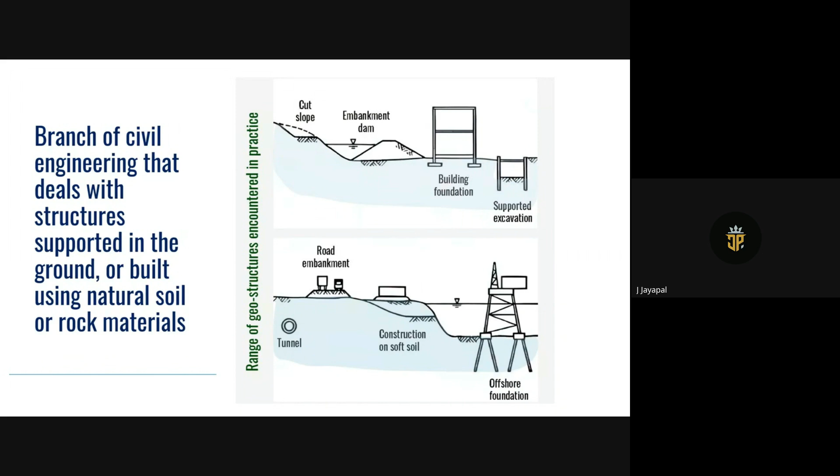Whatever applications you see on the screen are all geostructures, starting from cut slopes, embankment dams, building foundations, supported excavations, constructions on soft soils, areas closer to ports, marine soils, offshore foundations, road embankments, and almost all the areas you see here have the application of what we call geosynthetics.

This is a very fundamental thing that every civil engineer should understand. There are only three types of stresses in civil engineering: compression, tension, and shear. Apart from that we have other forces also, but let's keep that aside for this presentation. We'll focus on how soil responds to compression, tension, and shear. All these things you've been taught in strength of materials, engineering mechanics, fluid mechanics, and geotechnical engineering. Final year students would appreciate all this.

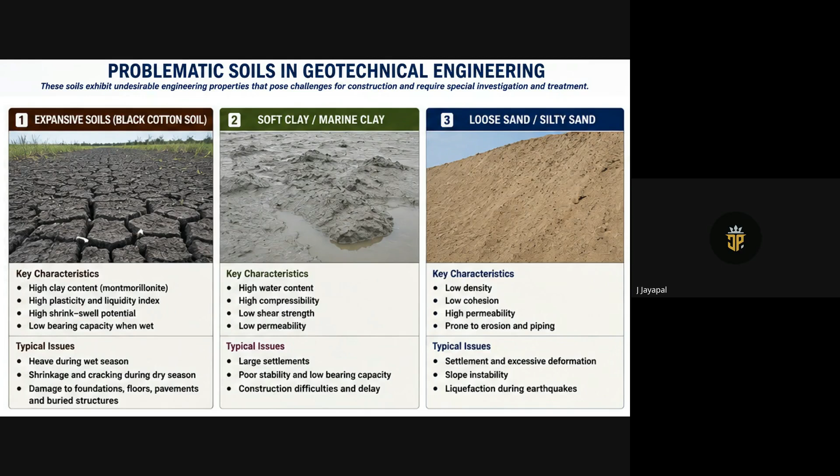Apart from that, we have collapsible soils, peats, and organic soils. I hope in this presentation to use both English and Tamil for easy understanding for students from Tamil medium background or people who don't understand English much. I'll use Tamil in between for better clarity. So we have collapsible soils, peats, and organic soils.

All these soils are usually discussed by civil engineers as ones to avoid. When you have peat deposits or organic soils, especially if you see in Tamil Nadu, in Kodaikanal, you have a lot of peat or organic soils. Usually these peat and organic soils are not suitable for construction, so civil engineers are suggested to avoid them.

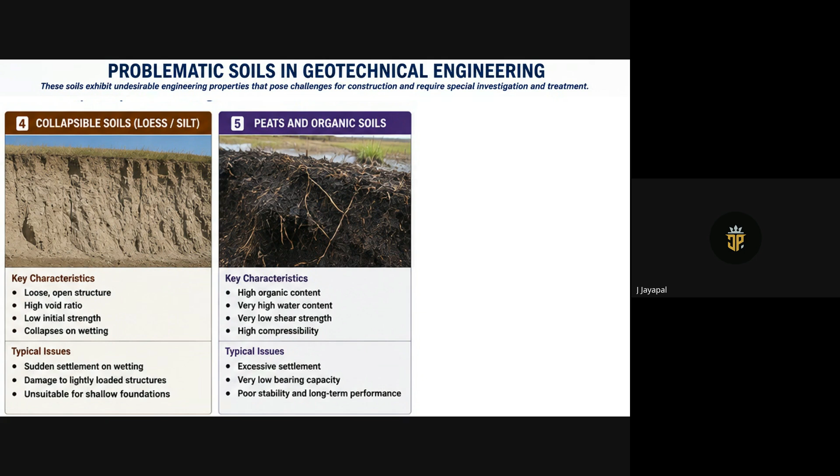Apart from that, you have dispersive soils, saline and sodic soils, and volcanic soils. They have their own unique characteristics like presence of dispersive clay minerals, high soluble salts, high fine content of ashes, sodic soils with very high pH, and low cation exchange capacity soils, similar to dispersive soils. So you have typical issues for every single kind of soil.

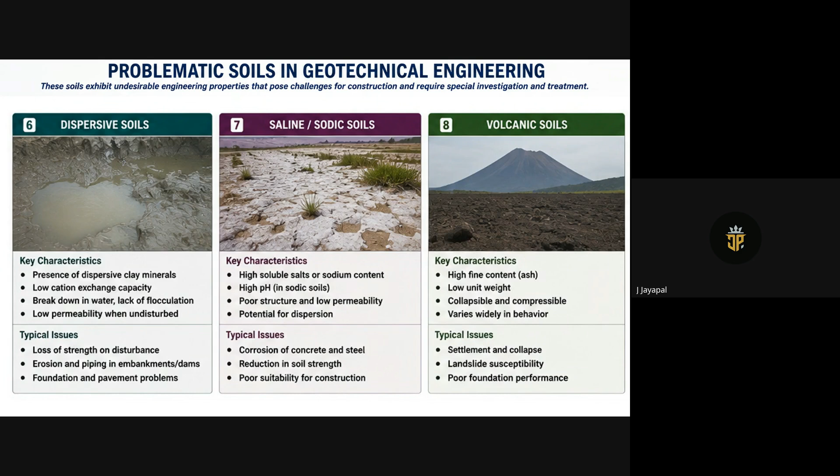The problem is, construction or planning for construction in all these soils is going to be very difficult, or challenging. When it is challenging, engineers are forced to think about alternative methods for solving problems arising due to these problematic soils. So all of these soils - let's say peat clays, liquefiable soils - come under this particular category.

You can go through all these key characteristics and the typical issues following with these kinds of problematic soils, once I share this presentation with Dr. Hari.

Jumping on to what is called a geosynthetic. A geosynthetic is fundamentally a natural or artificial product used along with soil in geotechnical constructions, geo-environmental constructions, or simply civil engineering constructions. You have both natural products as well as artificial products. Natural products include coir, jute, hemp, etc. Artificial products are polymeric products or metallic products.

When it comes to polymers, there are different types used in geosynthetics - probably in chemistry you might have studied different types of polymers. Polymers are fundamentally elements joined together with single units called monomers. All the geosynthetic products we'll discuss, aside from natural geosynthetics or geonaturals, are all made out of polymers. The word polymer is derived from Greek - poly means many, meros means parts. So it has many parts; you link all these parts in the form of monomers to get a polymer.

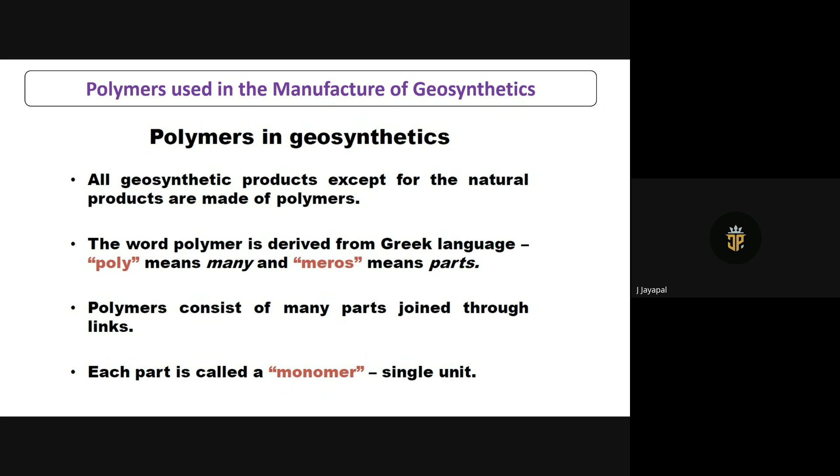So you have monomers. Polymerization is the process of agglomerating or combining all the products into a polymer. So finally, what you get is a product.

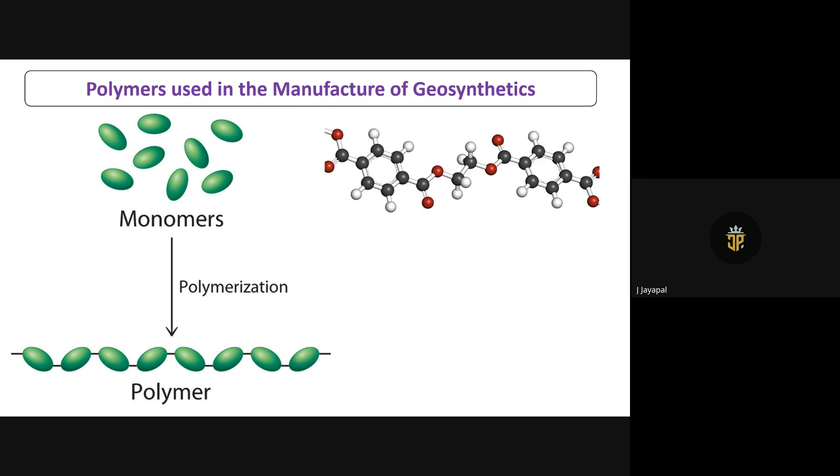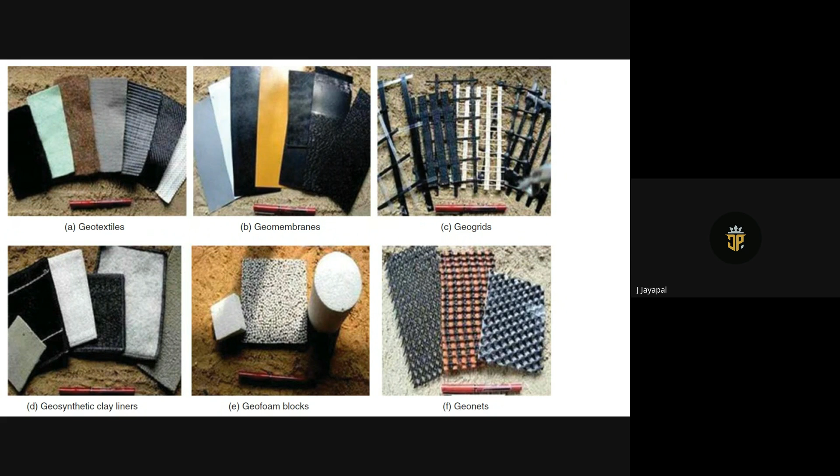Geosynthetic product. So there are different types of geosynthetics. I want you to pay attention here. You have geotextiles, you have geomembranes, you have geogrids, you have geosynthetic clay liners, you have geofoam blocks, you have geonets. There are n number of products. If you go to the market right now, there are plenty of products available. You have geocells, you have geobags, you have geocomposites.

So these are all some advanced additions to the geosynthetics family called as geocells.

So polymeric materials, which are fundamentally or specifically manufactured to be used in geotechnical and geoenvironmental applications, are made out of these polymeric materials, and then we use it accordingly in different sites.

The general definition we have said is different, but the fundamental actual definition provided by the American Society for Testing and Materials is that it's a planar product manufactured out of polymeric material, used in soils, rocks, earth, or any other geotechnical engineering related material, which forms an integral part of a human-made project, structure, or system. This is the actual definition provided by ASTM.

In India also, we have a code for geosynthetics, IRC codes, IRC specifications.

So you might have heard about reinforced concrete. The idea of reinforced concrete is like, concrete is good in compression, weak in tension. So you supply some material which is good in tension to compensate for the redundancy or the deficiency. It's the same with soils.

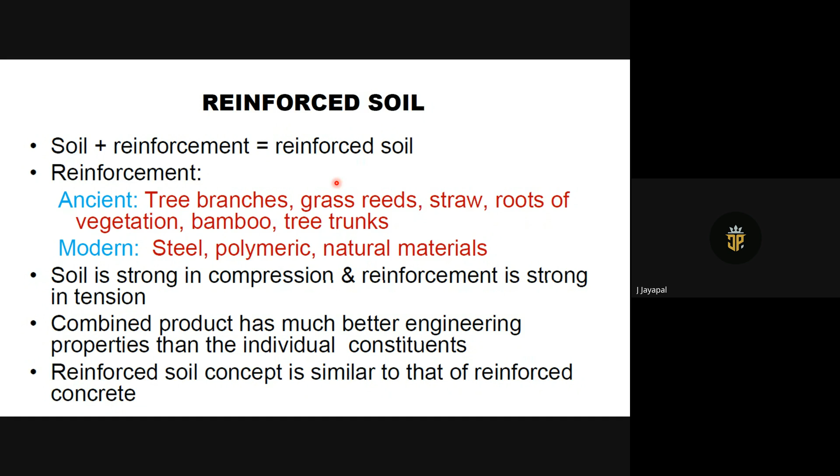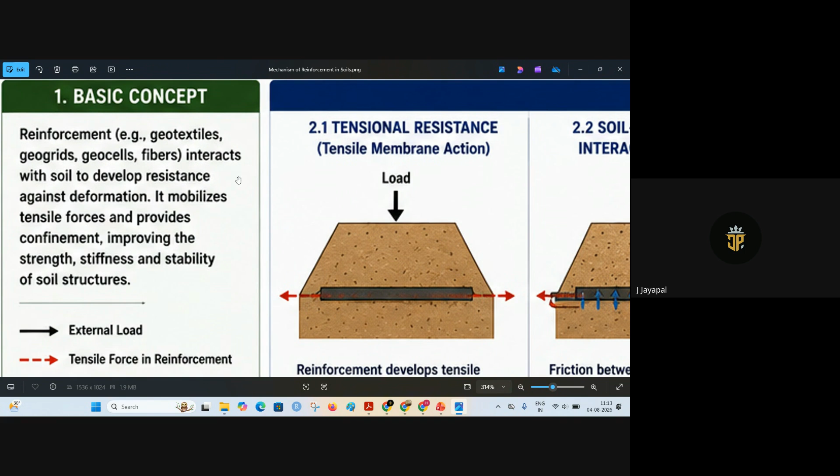So they interact with soil to develop resistance against deformation. It is going to mobilize tensile forces. It's going to provide confinement. It is providing the strength, stiffness, stability of soil structures.

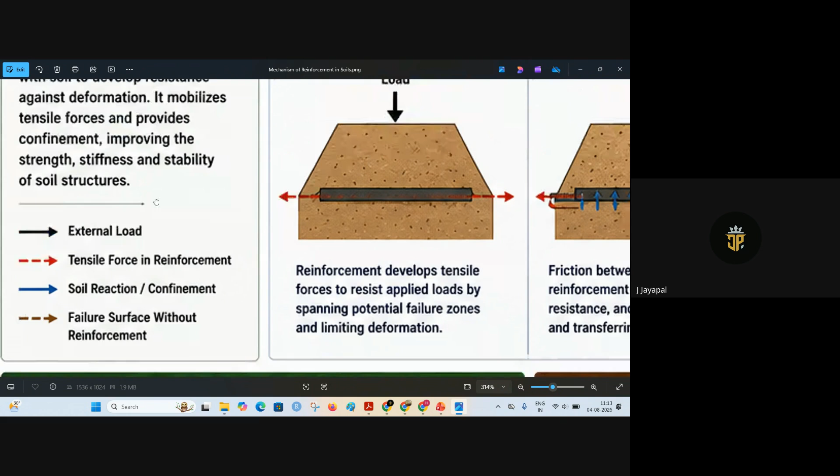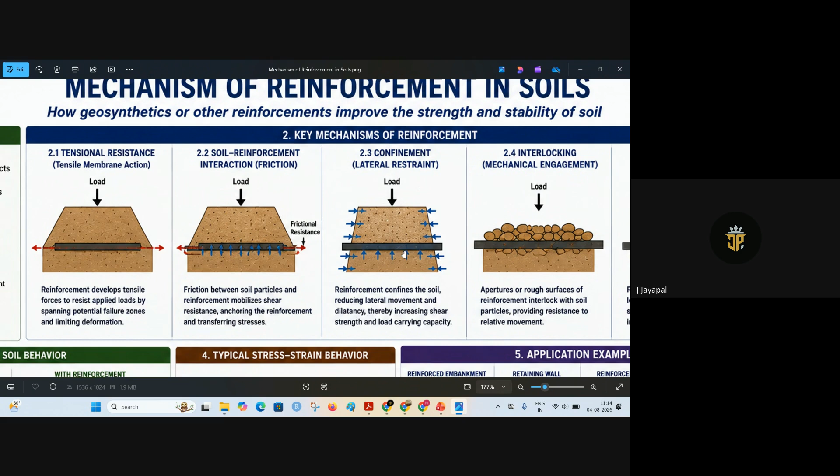You see here the tensile resistance is mobilized, or the tension mechanism in the reinforcement is mobilized with different types of key mechanisms. You can see that you have the tensile membrane effect when you place it inside the soil, or it can be experienced as interaction through friction, or you can say it provides a lateral restraint again if you place the reinforcements inside the soils.

And more importantly, when it comes to the case of geogrid, all of these particles get aggregated or get interlocked inside the spaces or apertures provided inside this geogrid. It's an interlocking mechanism.

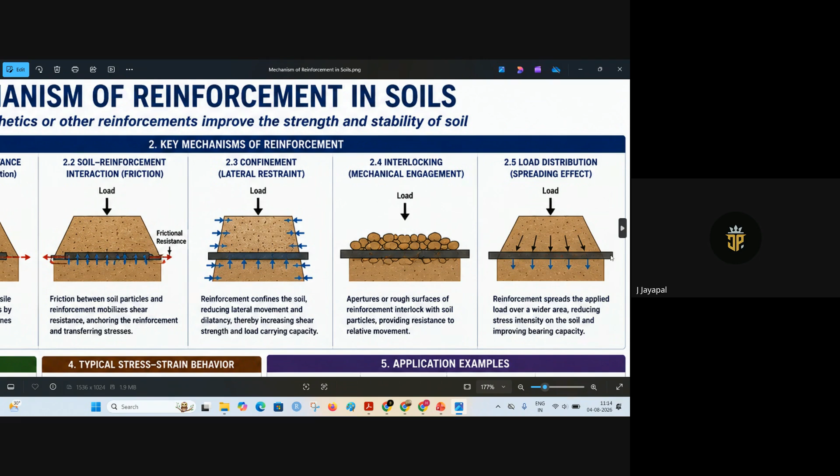And apart from that, you get the effect of spreading all these loads or spreading the tensile forces all along this membrane such that load is effectively transferred. So the key mechanism of reinforcement is through tension membrane effect, friction effect, lateral restraint effect, mechanical engagement effect, interlocking effect, and then the spreading effect.

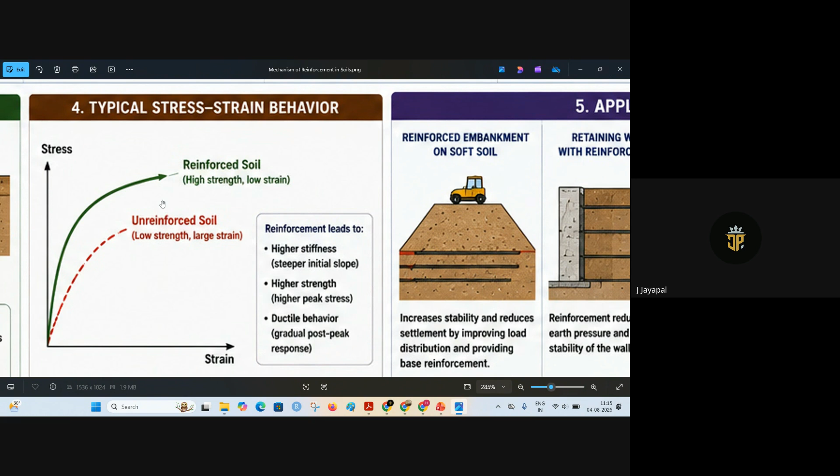Okay, so if you look at this particular stress strain curve of your reinforced soil and your unreinforced soil, you can see that unreinforced soils suffer large strains and low stresses. And if you plot again for the reinforced soil, you can see that the stresses experienced by this reinforced soil are pretty much higher, and for longer and larger strains. Okay, so this is very, very important for you to notice.

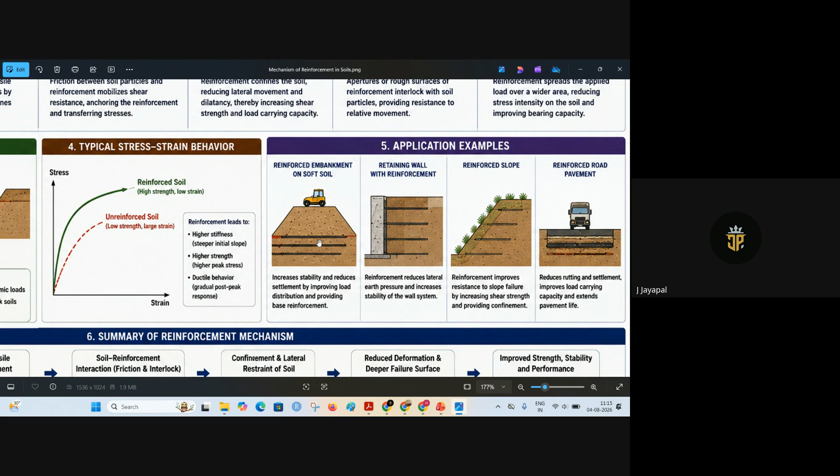And you see here, you have plenty of applications I'm going to make you comfortable with in due course. You can see that the reinforced embankment on soft soil can be constructed using these reinforcements, wherein the stability is increased and it reduces the settlement by improving the load distribution. You can take a typical example of a retaining wall. Possibly retaining walls you might have studied during your earth pressures related to K0, Ka, Kp. Okay, whatever type of retaining wall, with reinforcement you can just construct and increase the height of the wall.

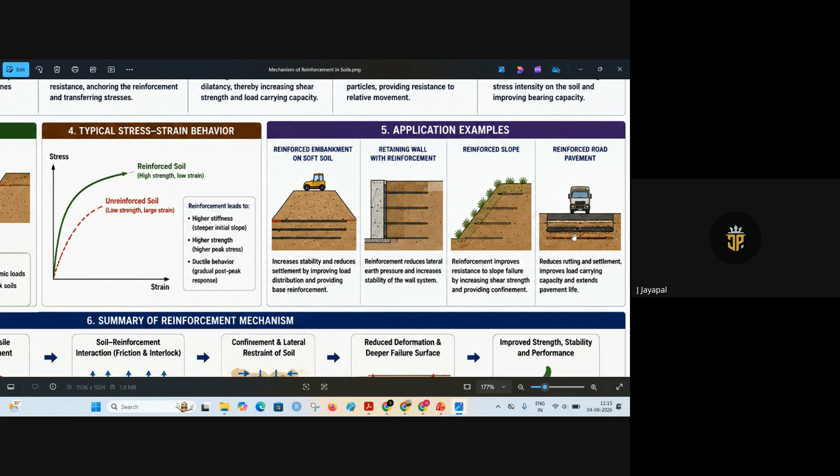And you can see that reinforced slopes can also be constructed with appropriate reinforcements such that you don't have a slope failure or slope instability. And apart from that, we have a wide variety of applications of reinforcements in pavements.

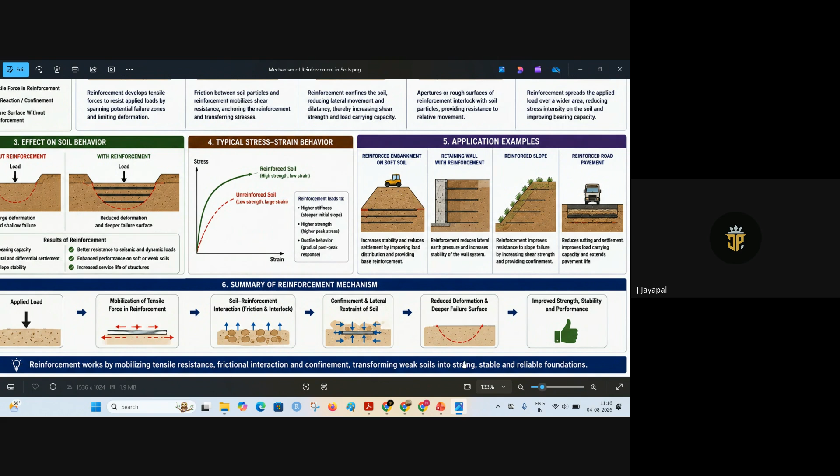Okay, so finally you see here the reinforcement works by mobilizing the tensile resistance, frictional interaction, confinement, transforming weak soils into strong soils, stabilizing, and finally giving us a reliable foundation. Okay, so this is the overall idea of the reinforcement mechanism or the way in which this geosynthetics work. Let's get back to the presentation here.

As I said, you have geotextiles, geogrids, geonet, geomembranes, and geosynthetic clay liners. This geosynthetic clay liner is a special product, a combination of clay powder and a synthetic material. Then you have geopipes, geofoam called expanded polystyrene (EPS), and geocomposite. If I combine a textile and a grid, it becomes a composite. If I combine a grid and a net, it also becomes a composite.

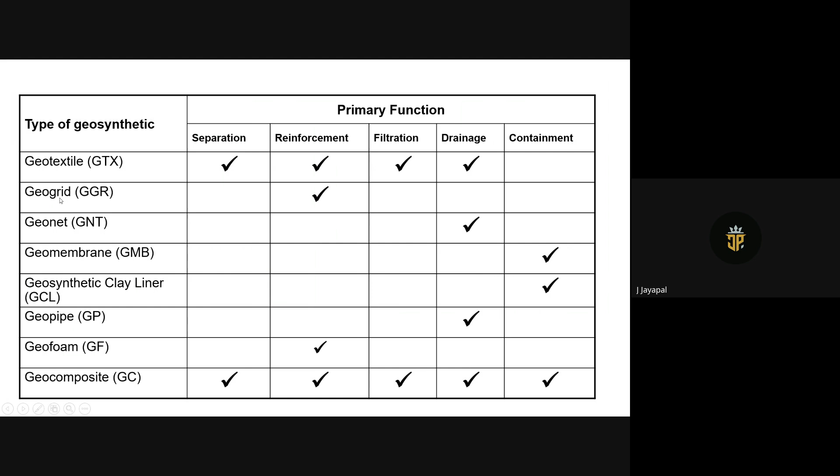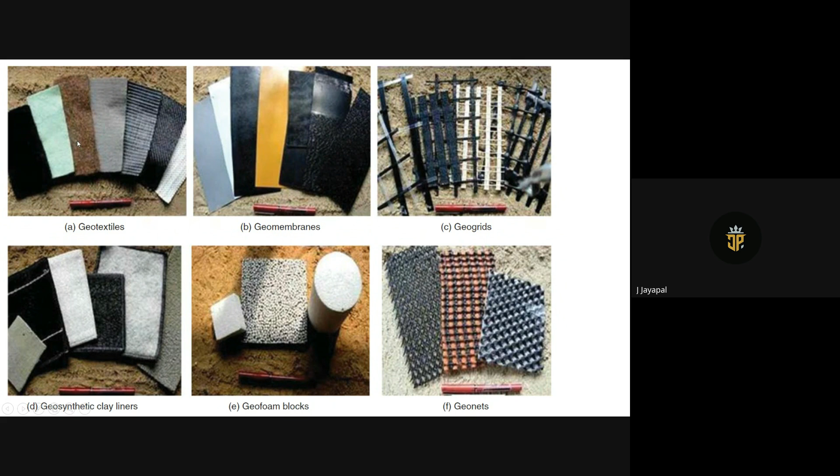Before I step into the roadway applications, let me show you the types of geosynthetics once more. This is basically a textile, this is a membrane, this is a grid. You have geosynthetic clay liners, which as I said is a sandwich of clay powder, possibly bentonite powder, stitched with top and bottom carrier and cover geotextiles. And then you have geofoams, expanded polystyrene, and geonets. These are all the major members in the geosynthetics family.

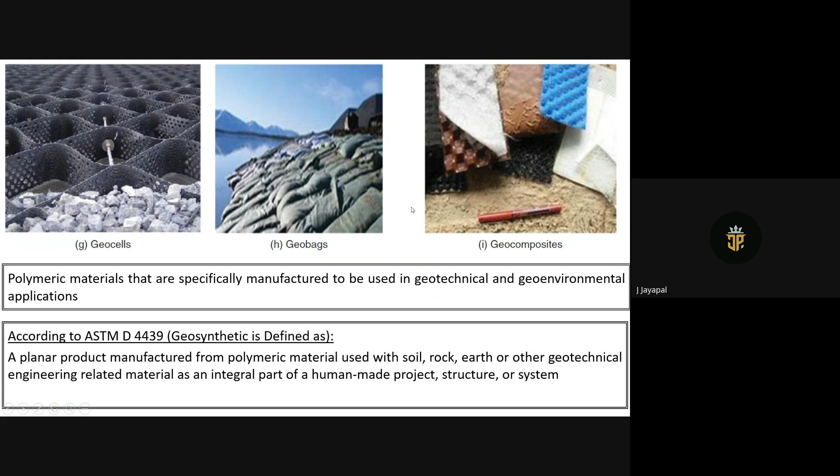Apart from that, there are other special products. Maybe if time permits, I'll touch on them. All these things are planar products, but this particular product is a 3D, three-dimensional product. You have geobags and then you have geocomposites.

Let's dive into the applications very quickly for the want of time.

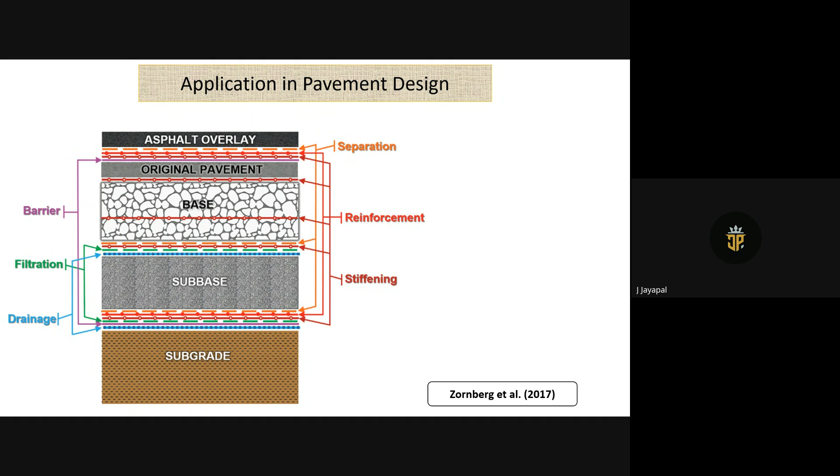Why? Because the majority of failures in highways or pavements happen because of tension and shear.

Let's take a typical example. You have two different soils, and let's say a truck is running on the surface over here. If this particular soil is a soft soil and you don't provide any reinforcement or separation member, all these aggregates get punched into the soil. Because of that, the traveling comfort is lost, the surface gets damaged over time, and the rider becomes uncomfortable.

Rather, what you can do is place a geosynthetic as a separator so that both soils are separated or contained, and you can see that the deformations are also less in both cases.

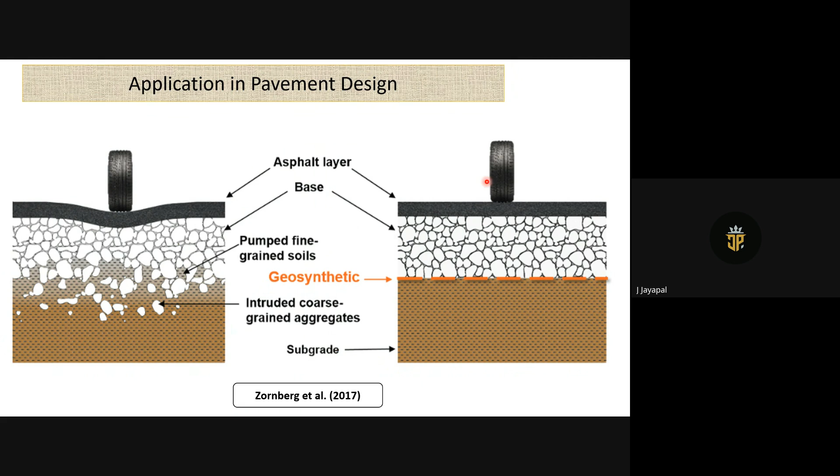If you compare, the amount of deformation happening here versus here is very clearly shown, just by providing one member called a geosynthetic, used as a reinforcement or separator.

The second thing you can see here is the additional pumping in of water during the rainy season or during increasing water table, sometimes during the monsoons.

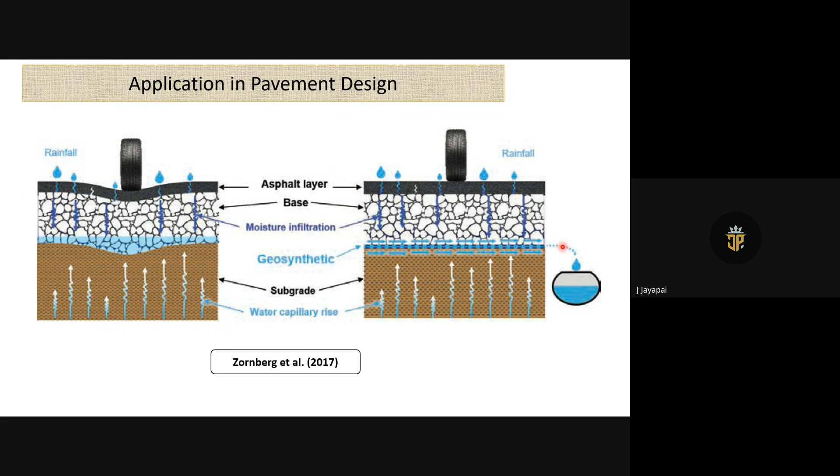There are plenty of other products available. In fact, there should be a separate seminar just for the products. Plenty of products are available, but we'll see only the engineering applications.

So this is a very beautiful slide that shows you what happens when you place a geosynthetic and what happens when you don't place a geosynthetic.

So again, the same typical example - you have a tire here and here, where the vehicle is passing. All the loads are concentrated in a specific place when these two soils are not separated, or when they are not sufficient enough to take care of the loads transferred from the wheels.

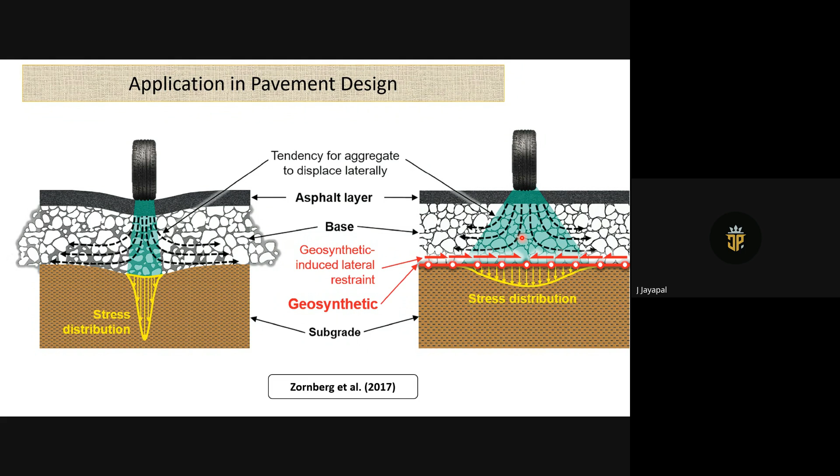This is one more effect - because of stress concentration you get to see a punching failure over here, and in this case you generally get a general shear type of failure. In geotechnical engineering you might have studied general shear failure and punching shear failure, so you can differentiate between the two.

So this is a very, very important application in flexible pavements.

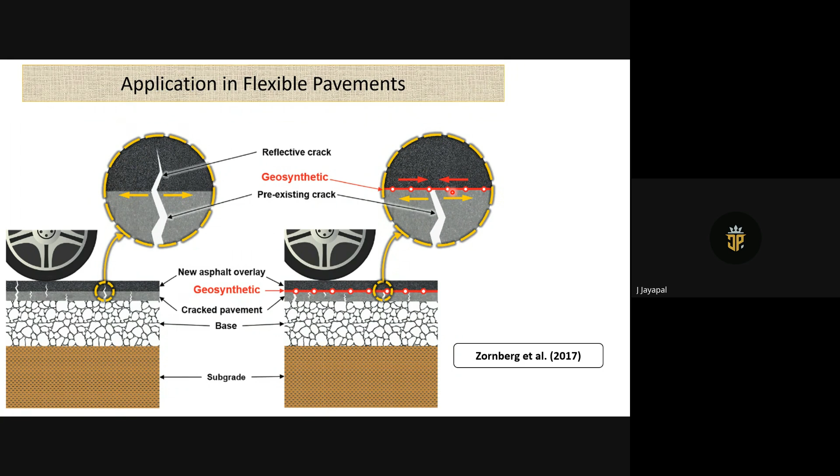Through this member you can transfer it - you can mobilize the tension stresses and tensile strains. So this is one important application of arresting reflective cracks in pavements, especially flexible pavements.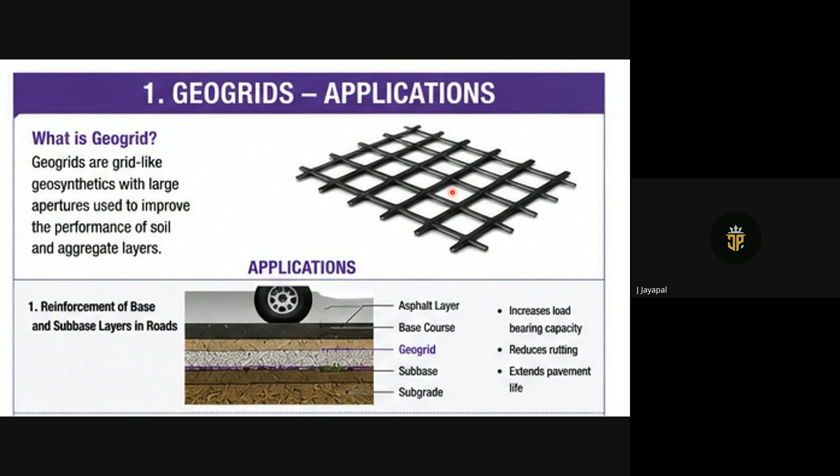So again, it's the same application here - these are all geogrids, just a simple repetition. You can use it in multiple places for easy understanding.

Again, retaining walls - you've directly seen many places, on highways you would have seen this type of retaining walls wherein the soil is getting reinforced. This is called your reinforced fill, and this is called your retained fill.

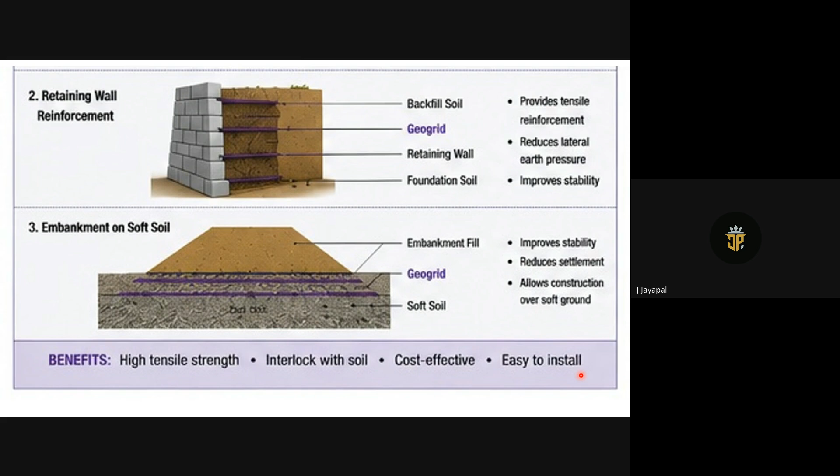Apart from that, they have applications in the railways. India is right now planning for high-speed rail corridors, and of course the first high-speed rail corridor is going to come from Ahmedabad to Mumbai. Now since trains will run at much higher speeds, the track needs to be stable. To enhance that track stability, you have to place appropriate reinforcements for railway track reinforcements.

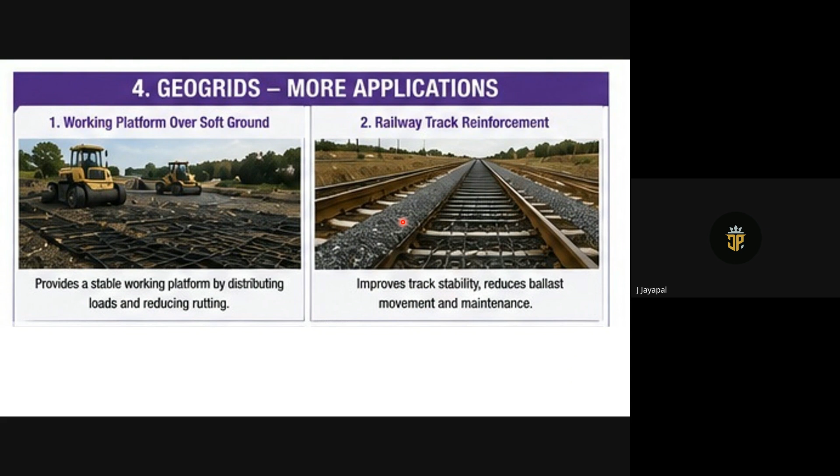You can use geosynthetics for improving the track stability, for reducing ballast movement and maintenance. Ballast is nothing but the aggregates. So you have ballast and subgrade. For railway track reinforcement, if you bifurcate it, you can see that you have different levels: ballast, subballast, then the actual rails, and then the subgrade.

This particular application, you all may have seen it, is called mechanically stabilized earth walls, MSE walls. What you do is reinforce the soils and you have these facing panels to hold all these reinforcements that are connected, with pavements running on top. In India you have this type of wall, whereas in foreign countries you have back-to-back walls, where there is a wall on this side and also a wall on that side - called back-to-back walls, B2B.

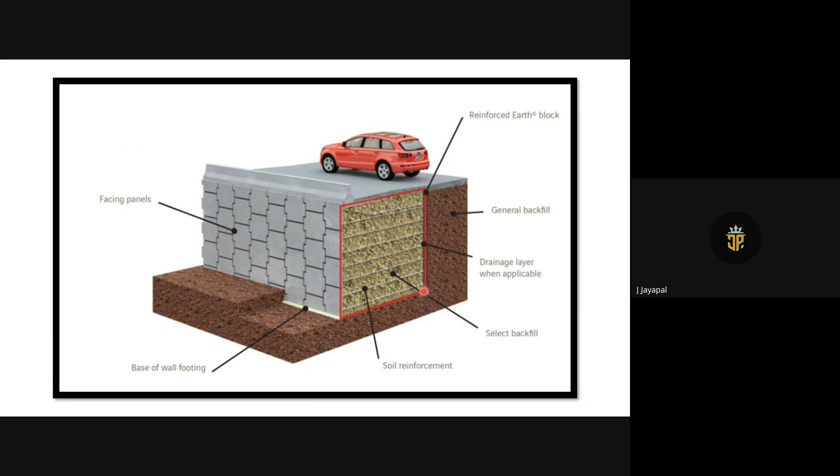You can see the base of the wall footing, the facing panels, and the soil reinforcement. This is the selected backfill or reinforced fill, and this is your retained fill. So you have separate drainage provided where and when applicable. You can see vehicles traveling on top. This is a very, very important application.

Let's say, for example, there is a slope over here - forget about this car and this space, let us initially assume this is the slope with only one lane. If you want to suddenly increase the height of the slope, you have to additionally add soil here, but just after adding soil, your slope cannot be retained because it will start to fail due to instability. This is because the angle cannot be increased beyond this particular slope. So in that case, what you do is reinforce it, and you can increase the steepness of the slope.

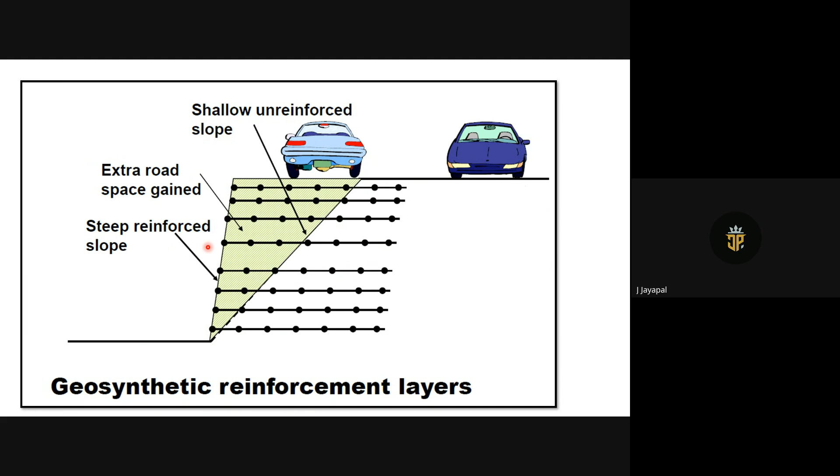The exact same application was brought out in this real-time scenario at Vijayawada. There is a temple called Kanaka Durga temple, and this is the pathway to that temple. They were facing a unique type of problem - this is a narrow stretch of a single lane road. When people go to the temple festival there to worship, there is heavy crowd congestion and traffic cannot mobilize. People coming from the opposite direction also cannot travel that distance.

So the proposal made was to effectively address this issue by building a wall. You can see the wall over here - it was the largest wall built at that particular time, around 22 meters high, a geosynthetic soil retaining wall to widen the road at Vijayawada. By building this wall, they mobilized extra traffic and gained road space. IIT Madras was the consultant for this particular project, and my guide Professor Rajagopal was the consultant, so these slides are borrowed from him.

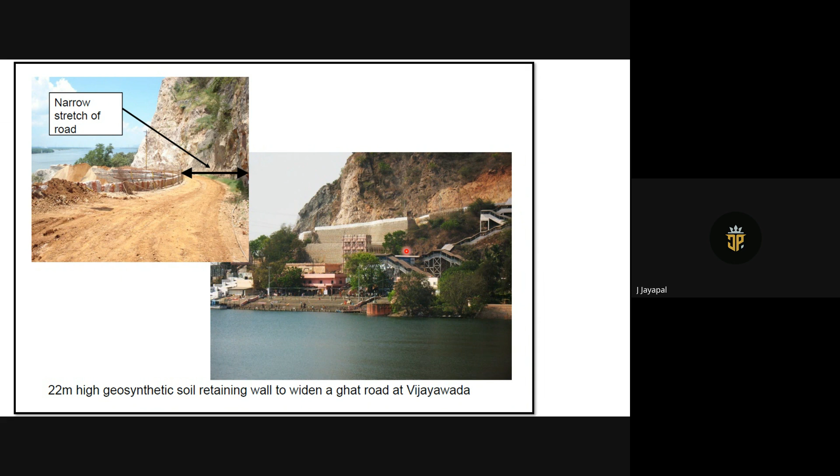It's a very effective application of geosynthetics, a real-time example that even now, if you go by train, you can see this particular wall.

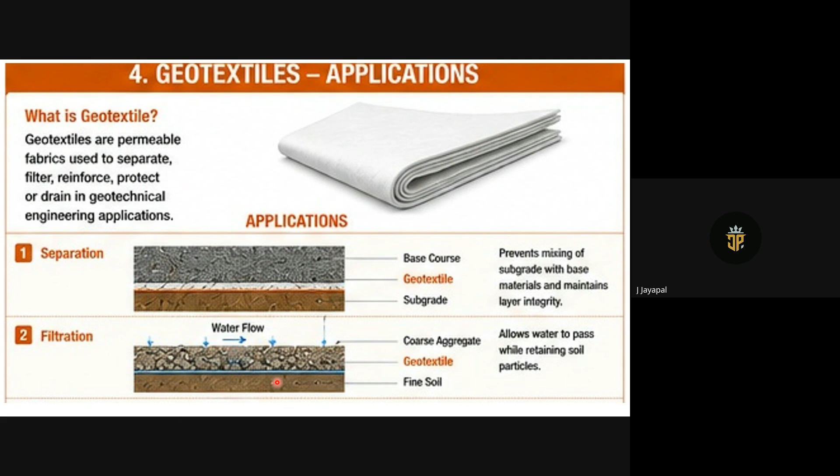Regarding filtration, I want you to notice carefully - filtration happens in two directions. One is in-plane filtration, where water travels parallel to it, along the plane of permeability. The other is vertical permeability - one is horizontal, the other is vertical. You can also call these in-plane permeability and cross-plane or out-of-plane permeability. The arrows represent this correctly, showing water traveling along this path as well as vertically - both directions of permeability are effectively provided by these geotextiles.

Apart from that, you have geonets. There are many differences between grid and net - grid is primarily used as reinforcement, and they are very strong members, whereas geonets are usually useful for drainage applications and are a little weaker members.

You have subsurface drainage or vertical drainage, wherein you can use these geonets, which is useful fundamentally to collect and convey the water to the pipe and finally reduce the excess pore water pressure generated during the loading applications or process.

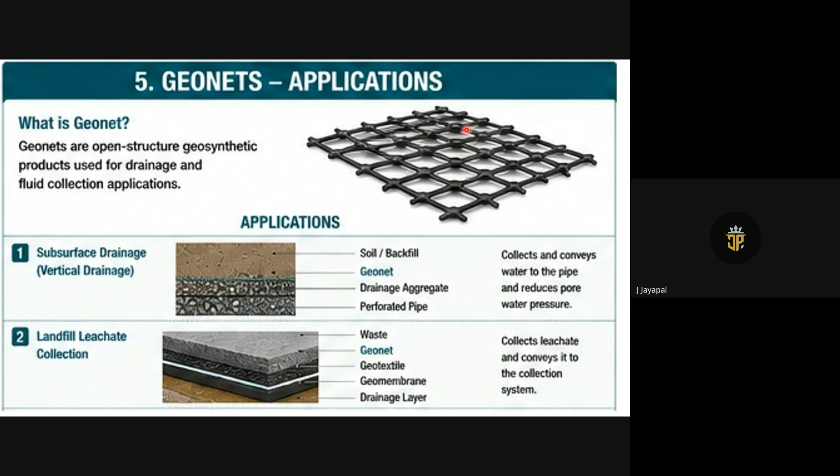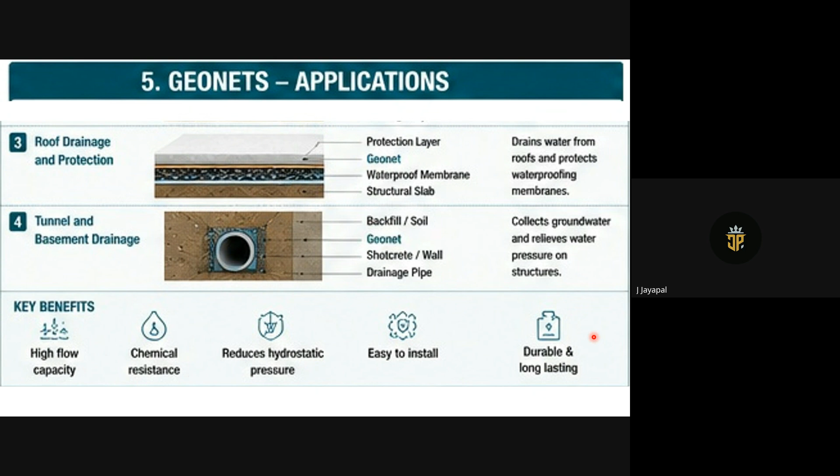These are all factory made products - manufactured in our factory, so we can control the properties ourselves. Whatever properties I want, the engineer will design for me in the industry or factory.

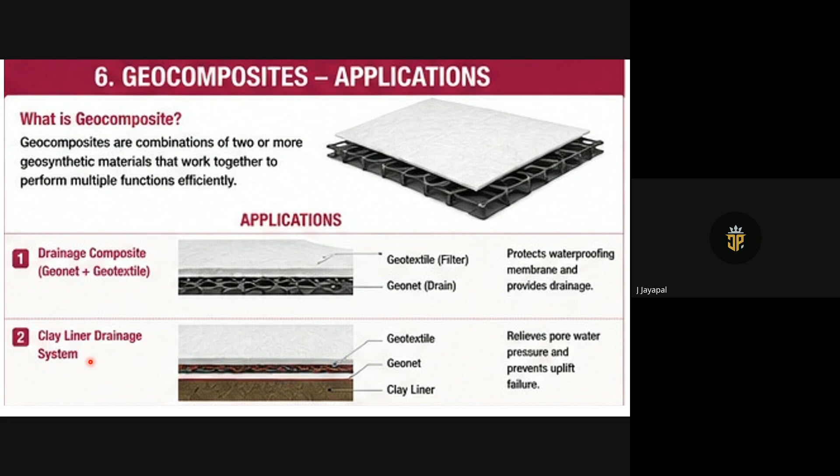As I said, when I combine two different materials, it becomes a composite. These geocomposites are a combination of two or more geosynthetic products or materials to perform multiple functions. One is called a drainage composite, when you have net and textile together. The other is a clay liner drainage system or geosynthetic clay liner, which we will see. Apart from that, you have different applications in landfill gas ventilation and pavement drainage layers - I'm not reading out the key benefits, you can go through them later.

The third important product is called geofoam. This is a very least explored geosynthetic product, I would say. It is a very lightweight material - rigid blocks used to fill material to reduce the weight of structures. When we have the mindset of reducing the structure's weight, we can use this lightweight material. These materials are not only light in weight, but also equally tough. A single person can easily carry a large block.

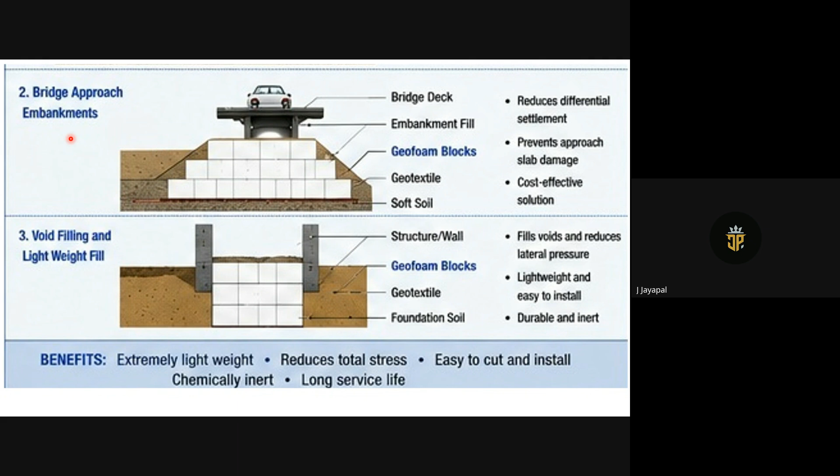So the applications are running between bridge approach embankments, void fillings as lightweight fill. Wherever you can use all of these lightweight materials to reduce the stresses and settlements.

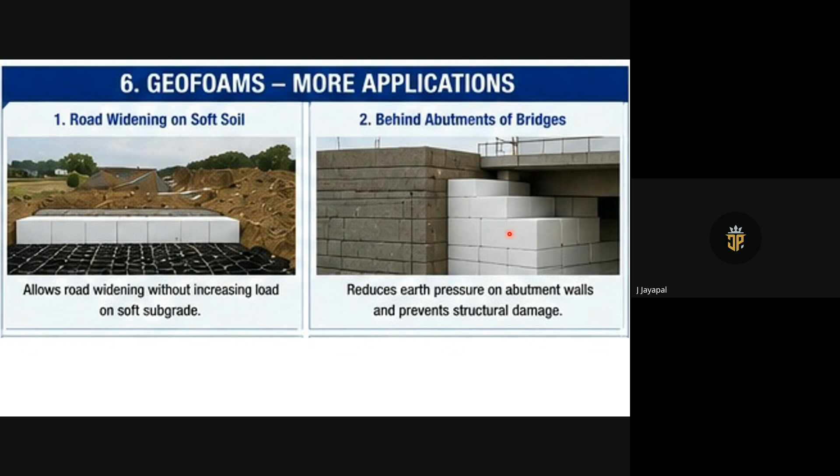They use it below that. But in India, the applications are very, very less. In fact, there are no such applications. But in foreign countries, you can have these kind of applications. There are separate codal provisions available in ASTM, especially for this geofoam or expanded polystyrene. In India, there are no such codes. In future, it will be developed.

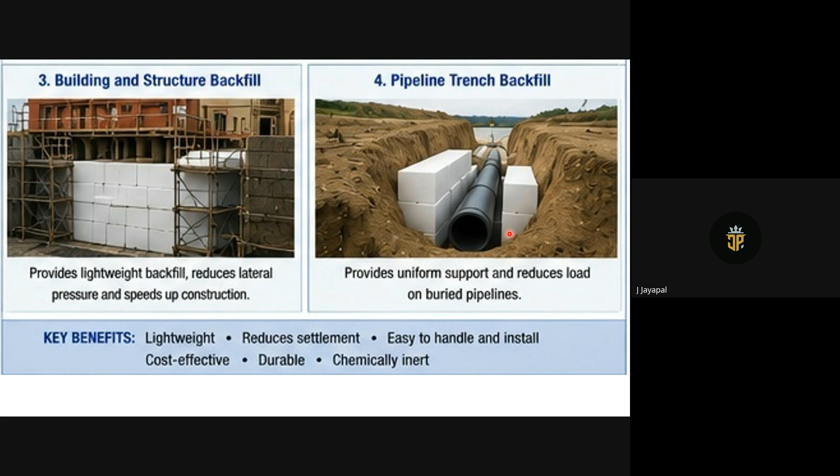Let's say, for example, if you look at pipelines, its alignment should not be disturbed, and the pipes should not be stressed because of the soils. So what they do is lightweight materials or cushioning materials will be provided. It can act like a cushion as well as a lightweight material for large diameter pipes and for long pipelines, carrying different types of liquids or whatever material inside.

So it is going to be light in weight, it's going to reduce settlement, it's easy to handle and install, it's cost effective, it is durable, it's chemically inert also. And if you look at its durability, it will be holistic and homogeneous, the same throughout. Why? Because it's again a factory made product. So you don't have variability of the material along this particular area when you have these blocks.

Different types - if you go online and search you will see that you have these blocks in different sizes. Accordingly, you can tailor make and you can create.

So let's see this problem very quickly, or let's try to quantify what we have said. Let's say that you have a 7-meter high embankment, which is 60-meter wide. It has to be constructed on a soft clay with water table on the ground surface.

The soft clay thickness is 5 meters. And the increase in stress in the clay layer can be taken as the pressure under the embankment, because the clay layer is thin when compared to the width of the embankment. So the clay layer has the following consolidation characteristics.

Your initial void ratio is 1.1, gamma is 19, your compression index is 0.5. There are two options considered. One is soil fill, the embankment of soil which you fill. The other one is you can use geofoam, lightweight material. So the soil fill has unit weight of 20 kN per meter cube, and the geofoam fill is 2 kN per meter cube.

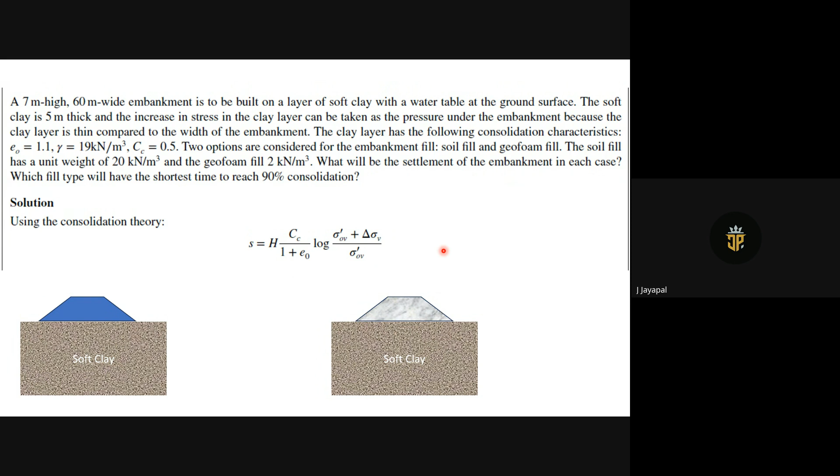So what will be the settlement of the embankment in each case? That's our primary target. You use your consolidation theory equation, H*Cc / (1+e0) * log[(P0 + delta P)/P0], or sigma naught, sigma dash V, delta sigma V by sigma V dash. What you do is try to calculate the stresses for both the cases.

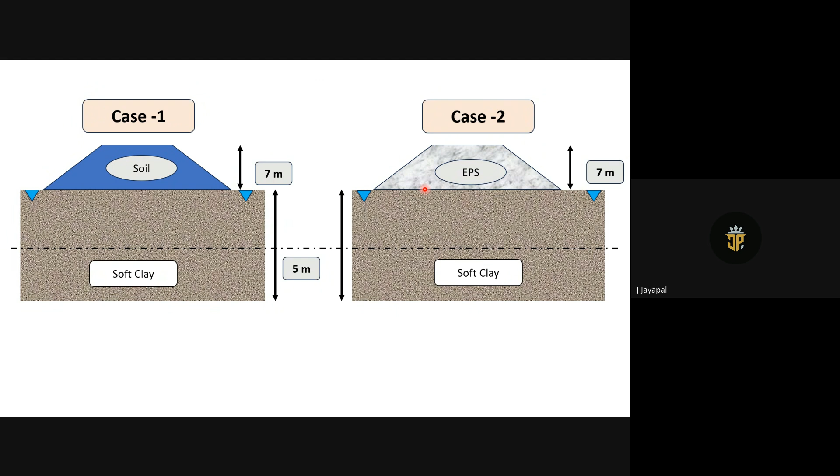So you see that both the embankments are of 7-meter height. The thickness of soil is 5 meters for both the cases. Both are soft soils. The only difference is the left-hand side case one has a soil embankment, and towards the right you have an embankment constructed using expanded polystyrene or geofoam, lightweight material.

So if you try to calculate the stresses, your delta sigma V, if you compute, becomes 20 times the height of the embankment, which is the unit weight. 7 is the height of the embankment. It becomes 140 kPa. And if you want to calculate the initial effective stresses, if you compute it by this equation, 2.5 into 19 minus again the excess pore water pressure that is generated, you get 23 kPa as your effective stress, the initial effective stress.

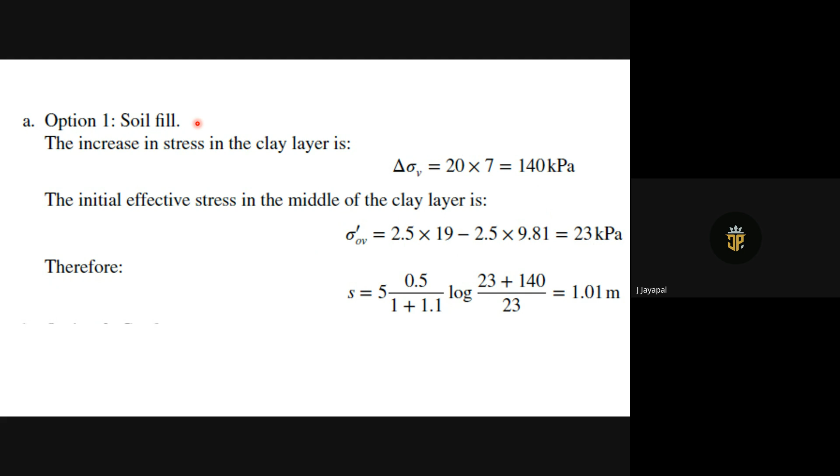Finally, if you plug all of these values into the settlement equation, which is HCC by 1 plus E naught, log of P naught plus delta P by P naught, the settlement you get is around 1 meter or 1000 millimeter for a soil embankment. When you build an embankment with soil, the settlement you get is around 1 meter. Second case, if you use a geofoam, a lightweight fill, you do the same calculation again, and finally what you get is 0.25 meters, which means 250 millimeters settlement when you have a lightweight embankment or lightweight material. So I can reduce the settlement by 1/4, and most importantly the time taken to construct is also less. This becomes an advantage for an engineer.

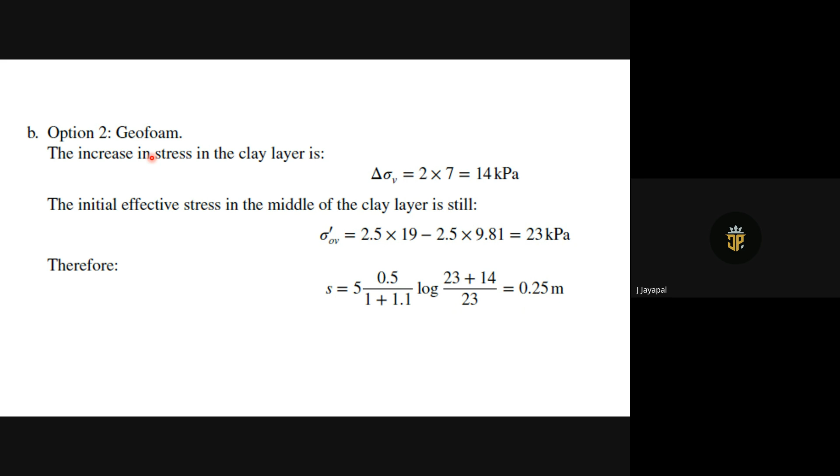Next product is your geocell. As I mentioned before, all the other products are 2D planar products, but this is not a planar product, this is a 3D product.

This was initially used in the USA. This was actually a military secret, and people used this geocell in the US. Then afterwards, it came into usage for the common public.

Towards the left you can see this can be folded, and you can easily carry it on your shoulders. It's a lightweight material, again you can easily carry it. And if you open it out, it becomes, or it opens like a web or a honeycomb. You can see the expanded and the folded type, and you can see small openings. These openings are provided for effective drainage.

Geocells are fundamentally 3D products, permeable honeycomb cellular structures made out of ultrasonically welded strips. You have these ultrasonically welded strips, manufactured with high density polyethylene stabilized with carbon black. You have this black color because of this chemical called carbon black.

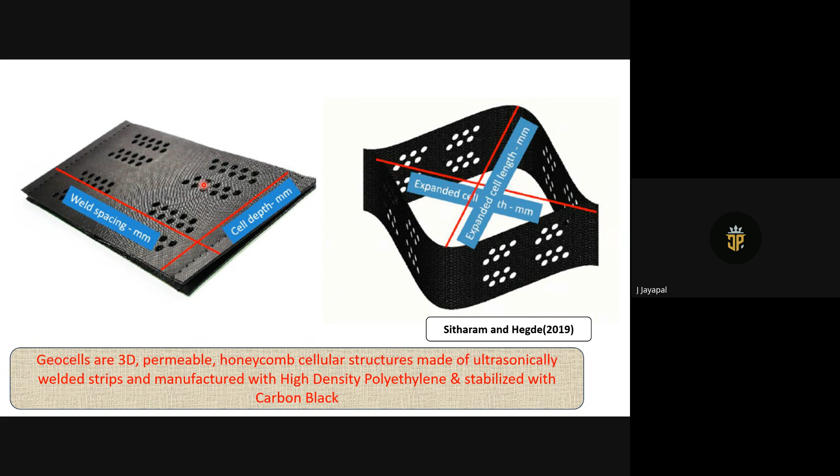So in what way is this product effective? It ensures the effective transfer of vertical stresses and lateral stresses. You can see the diagram, you can see the hoop tensile stresses. As you've studied in strength of materials, hoop tensile stresses, PD by 2T, PD by 4T. This hoop effect is also taken care of with these geocells.

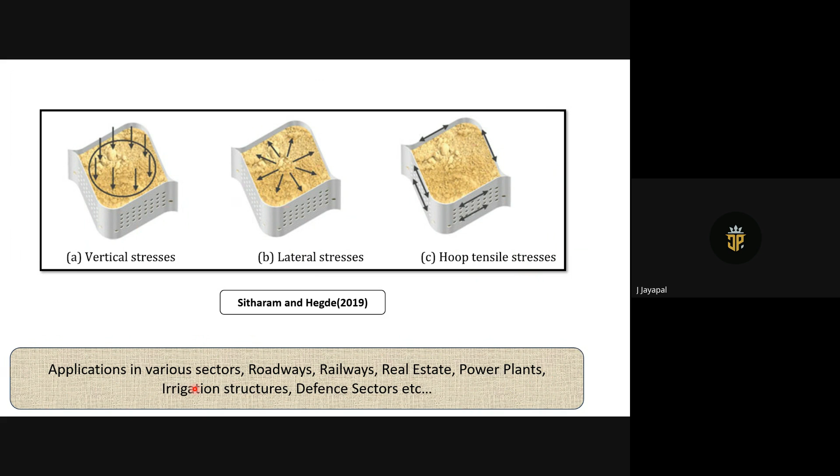The applications in various sectors include roadways, railways, real estate, power plants, irrigation structures, defense sectors, etc.

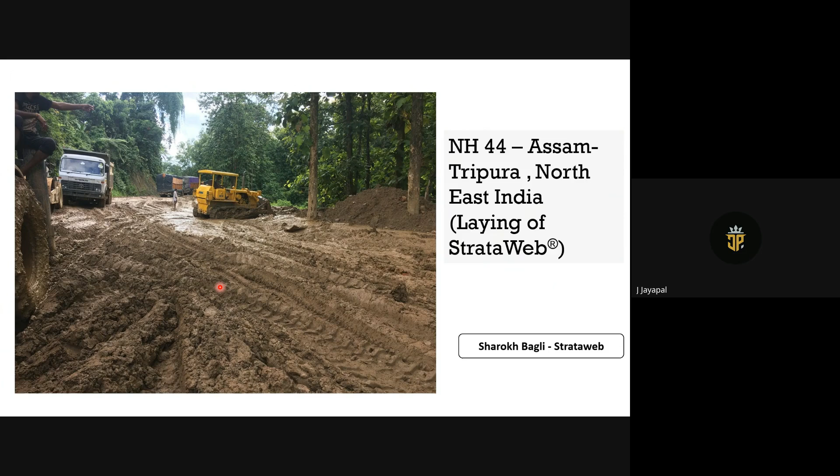This particular slide is borrowed from StrataWeb by Mr. Sharokh Bagli. You see that there was only one road connecting Assam and Tripura. You see the state of roads here, many trucks, buses or lorries used to get stranded because of this poor soil condition. The government was not able to decide on something. Finally, the problem was that all these trucks and lorries get stranded here, and especially the trucks or lorries that carry oil, maybe petroleum, were getting stranded. Vegetable lorries, the lorries that carry food materials, were also getting stranded. So they were not able to find a solution for that.

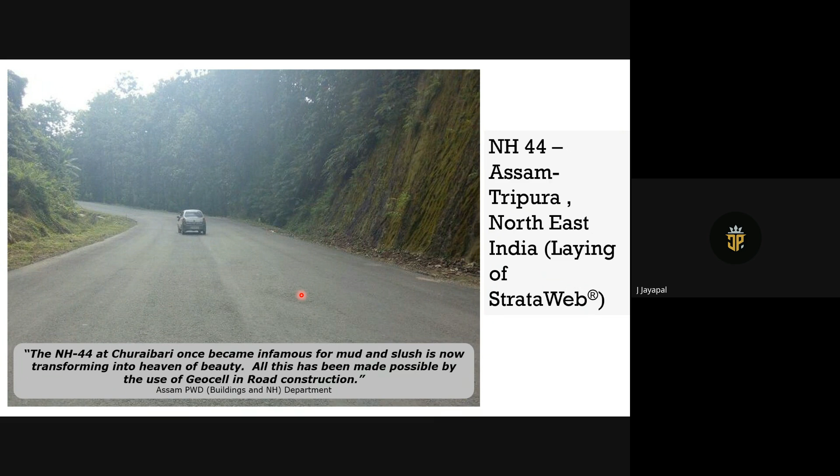So what they did was start utilizing an innovative product called geocell along this area. They effectively spread it out, just filled any granular soil into these pockets, and effectively the load could be transferred, and the geocells could perform. After erecting and placing the geocells, this is the status of this particular road NH44, and you can see the very beautiful view of this particular road once it got transformed to this position.

Apart from that, let's say if you want to construct a road momentarily in the desert regions of Rajasthan or any particular area, you just take this geocell, spread it out, fill it up with the inherent material already available on site, and you can see that you can move a tanker on this particular geocell. So this is the advanced mechanism presently available to mobilize trucks, men, material, arms, to anywhere in and around the places.

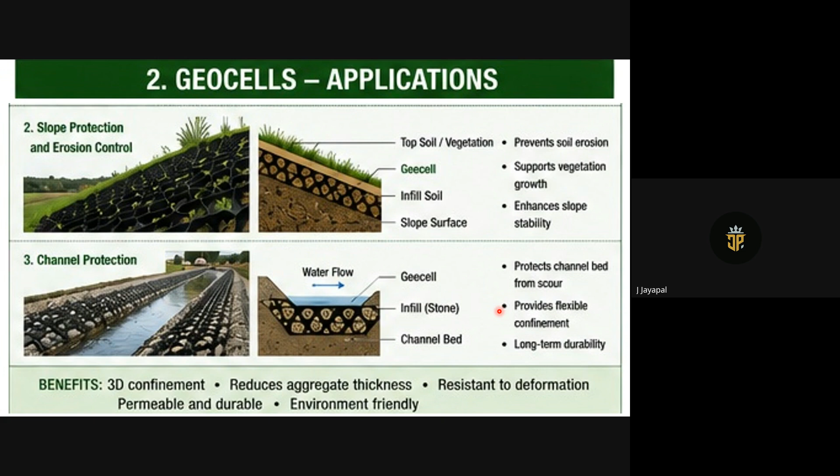So these are all the geocell applications. I have just given the other applications, you can just go through them. For the want of time, I'm not going through all of these things.

The hydraulic conductivity is 10 power minus 11 to 10 power minus 13 meter per second. Think about the number of zeros you need to add for water to travel through that. So 10 power minus 11 to 10 power minus 13 meter per second is the hydraulic conductivity, or permeability.

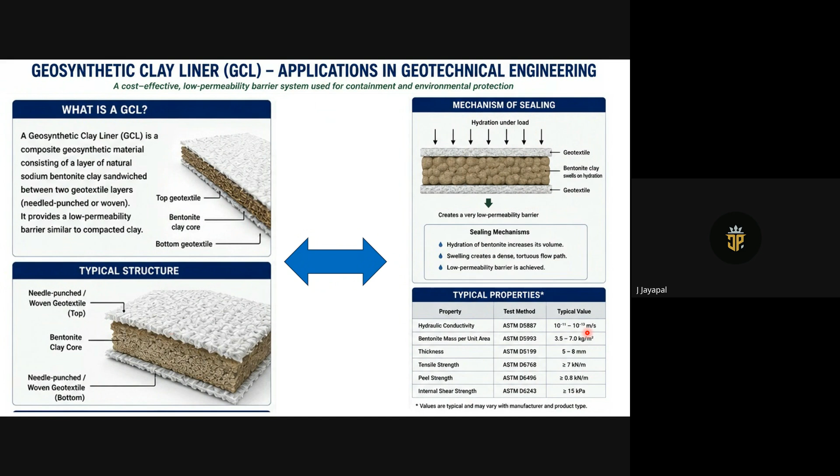Peel strength is around 0.8 kN per meter. Internal shear strength is greater than around 15 kPa. For all of these properties you have American Society for Testing and Materials codes. What happens is, if you allow water to pass through, it will pass through only on one side. Once it reaches the clay powder, the clay starts absorbing and swelling, but it will not yield water outside, because the permeability of this sodium bentonite clay is around 10 power minus 11 to 10 power minus 13 meter per second. I don't know how many of you have a physical feel for these numbers, but I want you to appreciate them.

This is a better picture. You can see the clay powder here, and you can see the geotextiles - the upper geotextile and the lower geotextile. You can also see the reinforcing fibers connecting both geotextiles.

This is used in landfills. In Tamil Nadu, in fact in Chennai, there is a landfill - it is there in Kodungaiyur. Whatever waste is generated in Chennai, some part of it is being dumped inside these landfills. So one such landfill is available in Chennai.

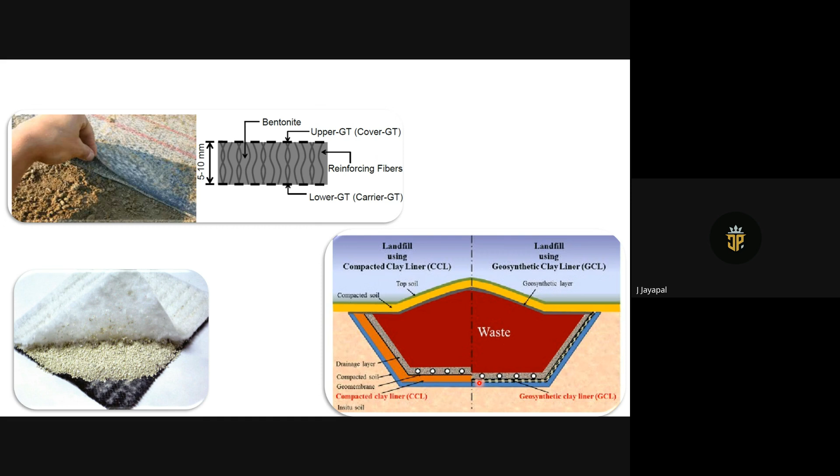In fact, there was a beautiful example that I used to show. I don't know whether I have it here or not, but it's a much better picture that I'm showing here.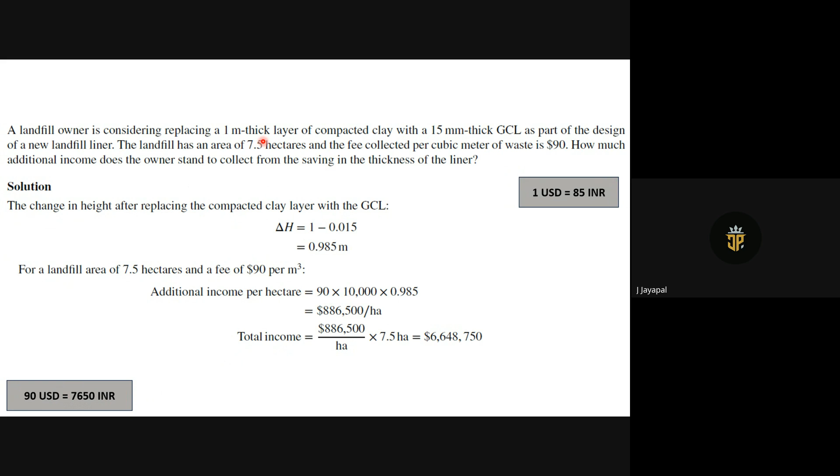Compacted clay liners are additionally provided because the landfill owner may want to have a super safe landfill.

Especially during earthquakes and seismic activities, you don't have control over all these things, but with geosynthetics the performance is much better.

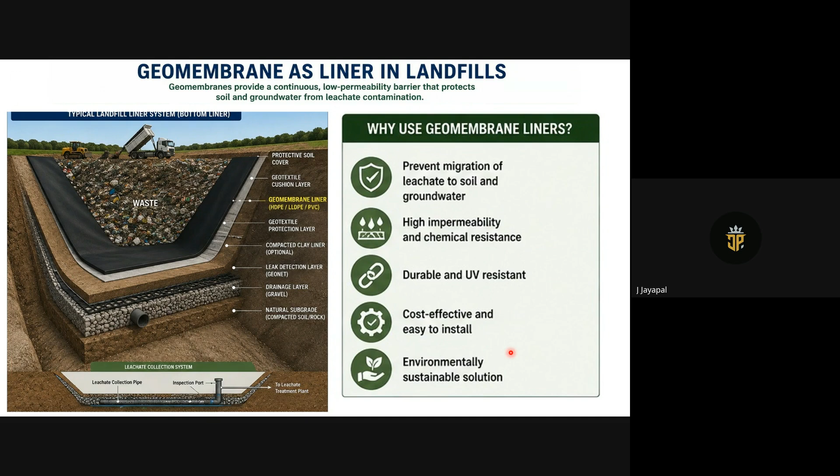So the amount of expenses used in transportation, for oil, for excavation - all of these things can be avoided. If they are avoided, you are saving time. If you are saving time, then you are saving money. If you are saving money, then you are a good engineer. Okay, so these are all some of the installation steps.

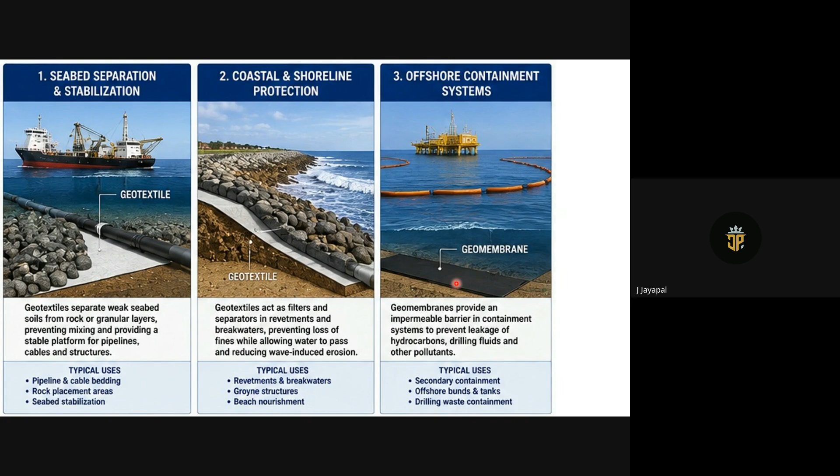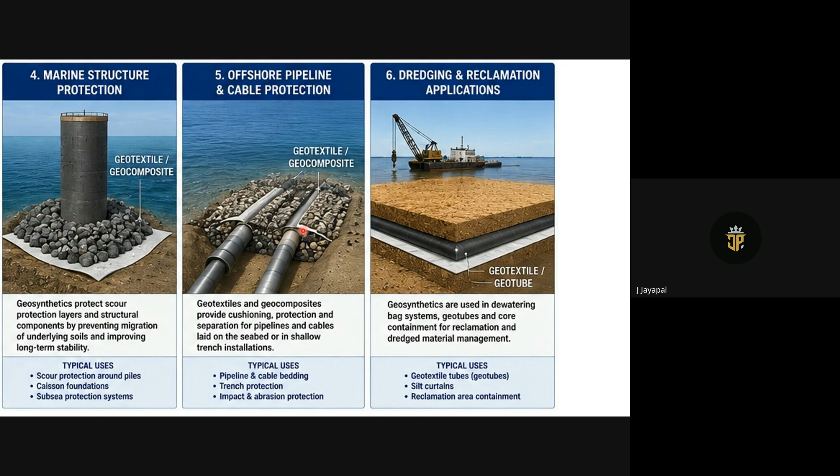This particular course is being taught to master's students in geotechnical engineering as well as PhD students. This is actually a 6-month course. There are different other mechanisms and concepts behind geosynthetics or soil reinforcement. I'm just giving you an overall picture or overall idea.

This is again one beautiful picture that shows the rock and concrete protection layer provided especially during dredging operations. You can see how the geotextiles or geocomposites are provided just below the soils. You have these pipelines running in parallel that can carry liquids as well as internet cables, whatever it is. These pipelines are provided sufficient cushioning with geotextiles and then placed exactly on the seabeds.

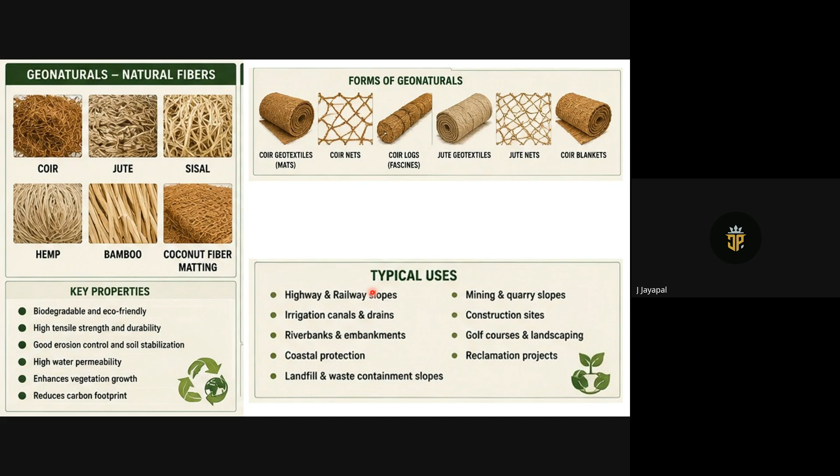This particular section I am purposefully avoiding, but I am providing it to your teacher, Dr. Hari. Why? Because equivalently speaking, we have natural materials also available. Let's say, for example, in West Bengal, in Sri Lanka, in Kerala, you have equivalent products called coir, jute, sisal, hemp, bamboo, and coconut fiber mattings. All of these things are used as reinforcements.

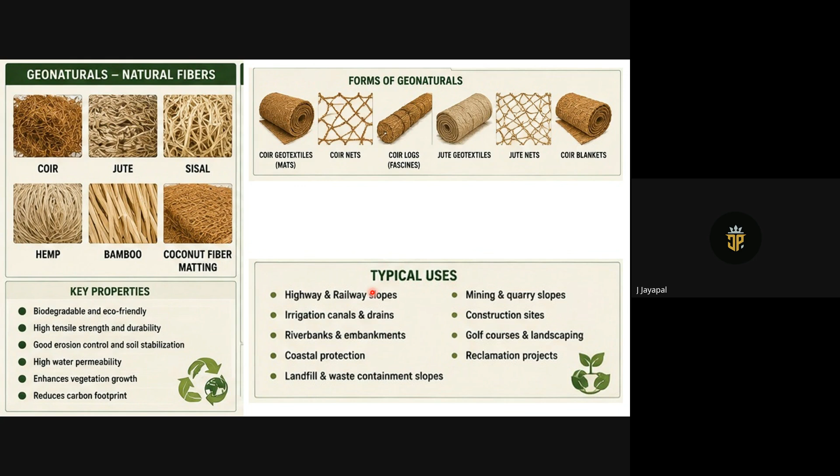Especially for geonaturals, there are only two products: one is called jute, the other is called coir. In fact, people from Kerala are extensively making products - geotextiles, geonets - made out of coir, made out of jute, and coir blankets, and using them effectively in different applications, especially for erosion control.

And in places where soil erosion needs to be prevented, you can use erosion control mats. Especially right now, you see we have Kaveri water coming from our neighboring state. If you want to avoid water loss, if you want to avoid destruction of these earthen channels, you have to lay out these natural materials. These are biodegradable materials which have a very short life, whereas polymeric materials have a much longer life than these short-lived materials.

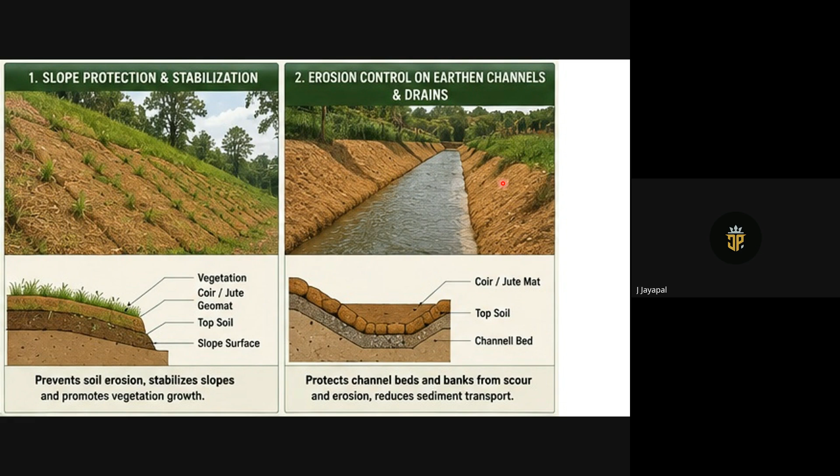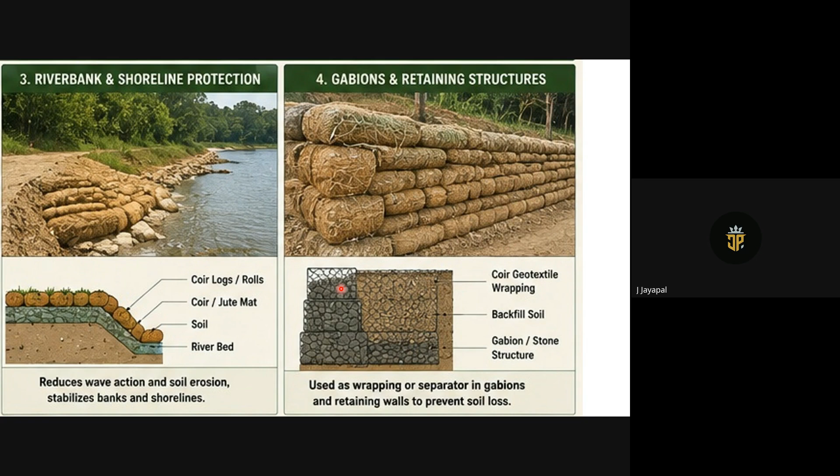So again, you can see all of these applications, especially riverbank and shoreline protections using natural ways, gabions, and retaining structures made out of coir geotextile wrapping. Gabions are nothing but steel wire baskets filled with aggregates, especially to increase weight, increase stability, and for different gravity loading applications.

Equivalently, all of these natural products can be useful for landslide prevention, slope protection, and improving slope stability. Additionally, they'll spray seeds along these natural products, namely coir or jute. So during the monsoons, these seeds start to germinate. Once they germinate, they lay out roots. These roots penetrate into the soil and act as natural reinforcements. In fact, there is one beautiful natural reinforcement called vetiver.

So just go and type in internet the effective usage of vetiver as reinforcement. You'll get to see a lot of benefits. So that itself is a topic of discussion.

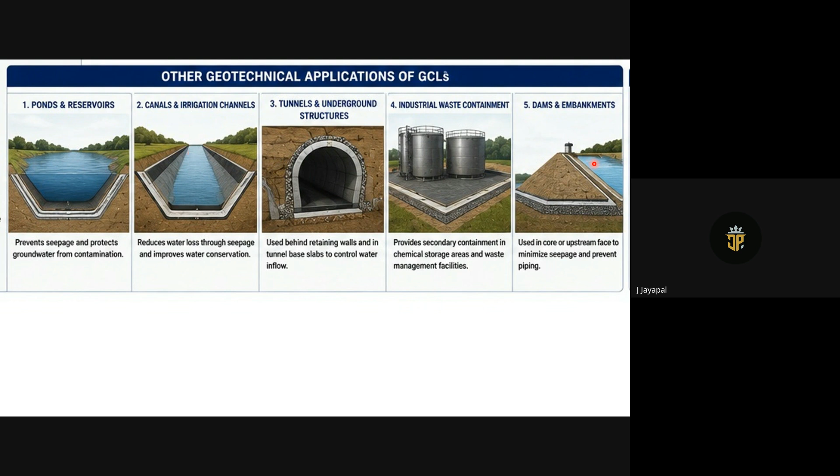So as a summary, we have seen what is called geosynthetics, and what is the mechanism of reinforcement, which I have tried to explain. To some extent, I have also touched on applications in pavements, embankments, and offshore applications.

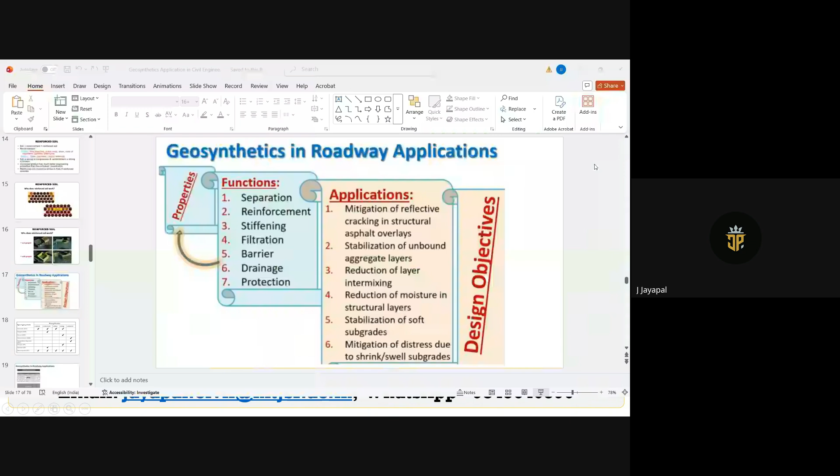Hari? Yes, sir. Any audience having any clarification related to the topic discussed by the speaker today? Sir, one of the students is asking a doubt, sir. Yes, please.

Sir, actually, you said the jute material is also a geosynthetic material, right sir? How is its lifespan? Does it tend to decompose or degrade? I am not able to hear your voice properly, can you come again once more? Sir, am I audible? Yes, to some extent. What is your exact question?

So he would like to ask - you have mentioned at the end of the slide the utilization of coir as a reinforcement. He's asking about the life cycle of the coir.

Okay, let's say for example you have a village.